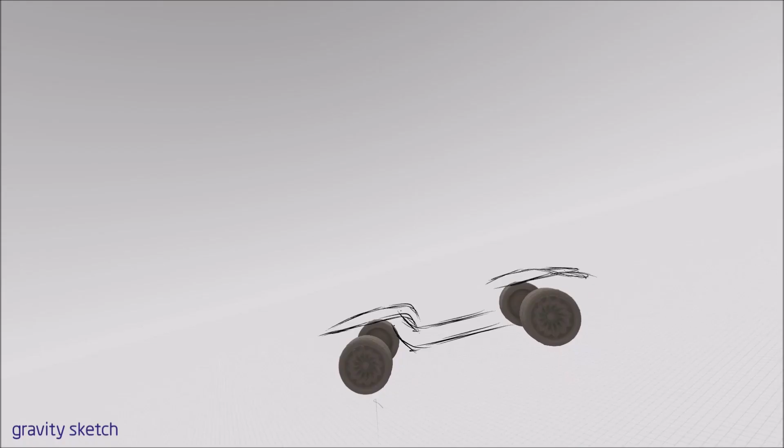So to get center line, press the tools menu, planar, and then you can move it around by pressing your pointer finger trigger and sketch on that plane. But if we half hold and point the face of the controller in the direction we want to go, we can lock it on center line like this, and then begin to sketch the center line of the vehicle.

You group all these lines together by grabbing them and pressing the purple menu button.

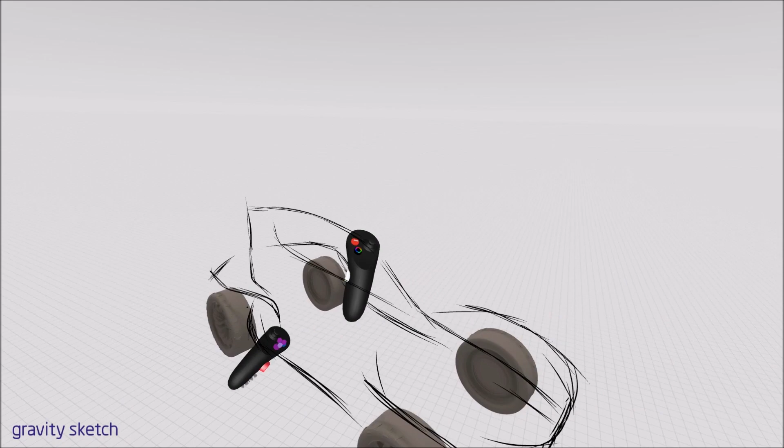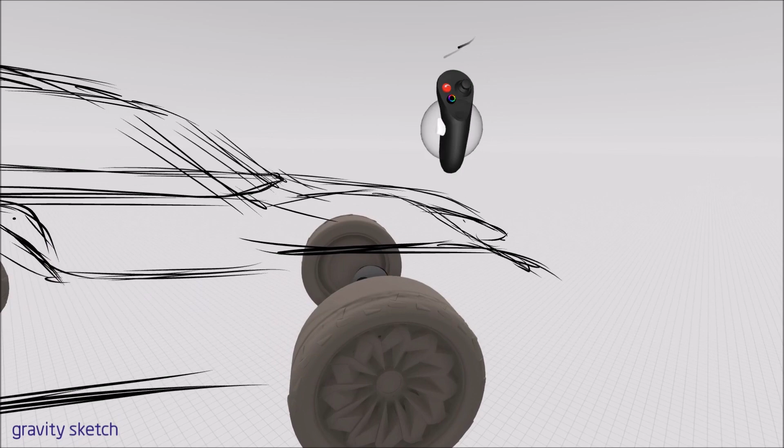If I want to move down this hood line here, I highlight with the grab sphere and then align my controller's head to toe like this, and then hold and move down.

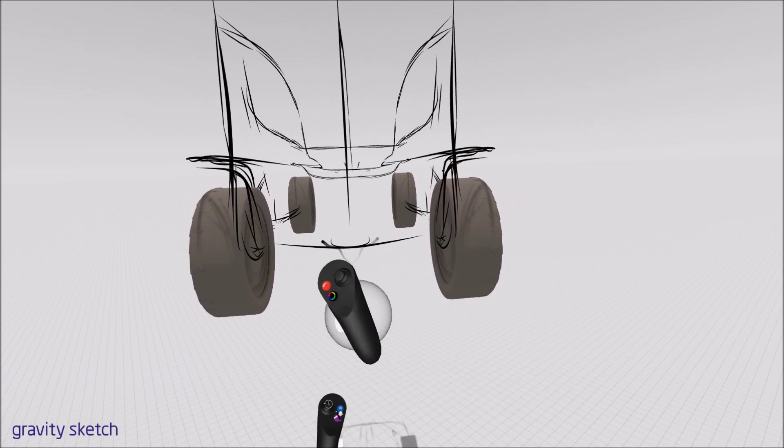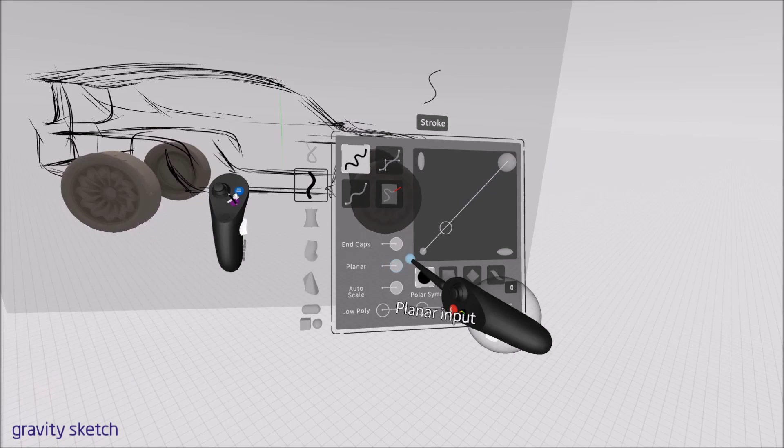A good way of making some wheel wells is to come to the tools menu, select stroke, turn on planar, and turn on precise mode, and then align that plane like this. And then click out those lines.

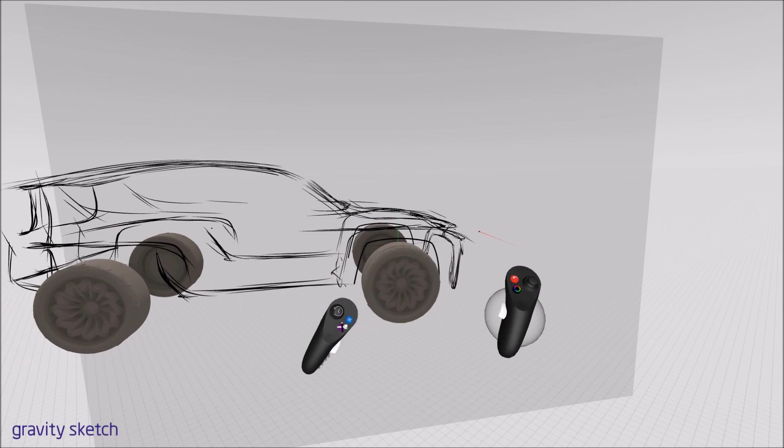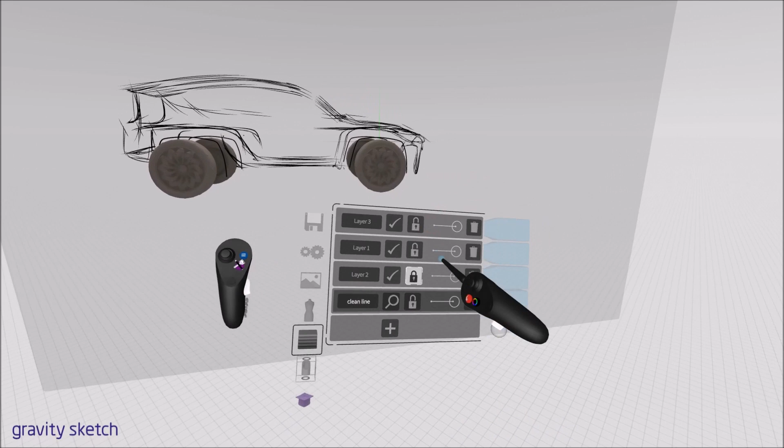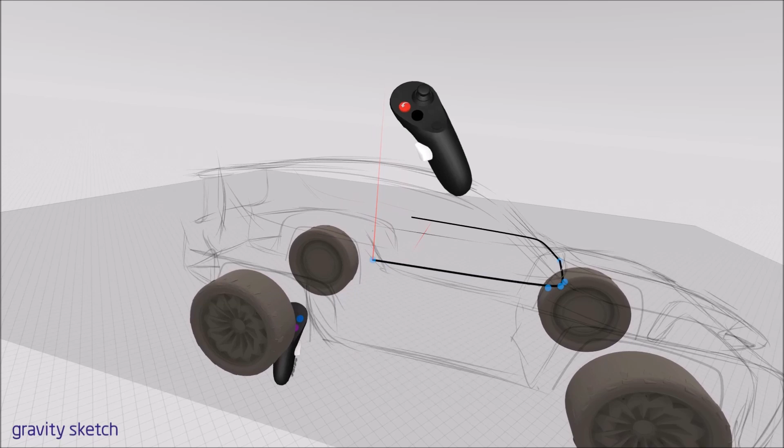We go to layers, get a new layer, clean line, lower the opacity, lock, and make sure that we have the magnifying glass on our new layer. Now come in here, start to make a clean sketch line. Magnifying glass just means that you're active to that layer. And if you click it again, you can minimize everything else in the space and just make that layer active.

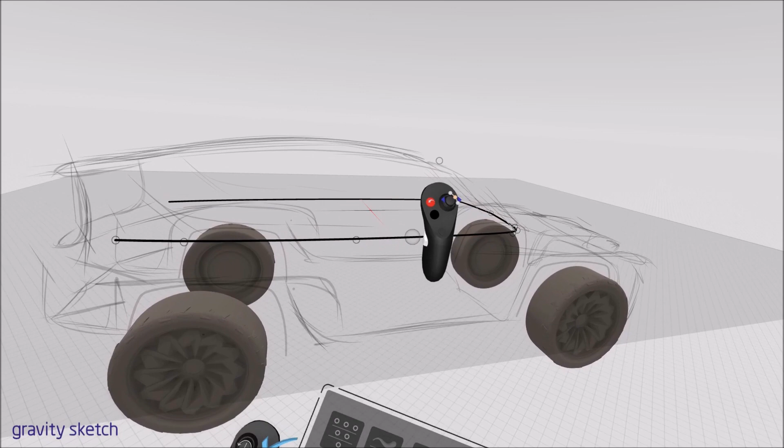Now I have a line that I made with Planar, and you'll notice if I put it in edit mode, I can't move the edit point up. I can only move it in these two directions. But because it's in edit mode right now, we can turn off Planar and then adjust it in all three axes again.

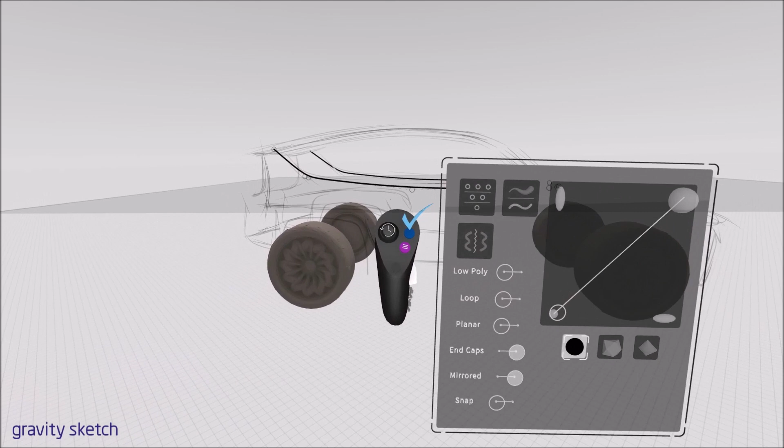Once you have it in edit mode, it's just going to be the blue check mark here, and that will take it out. And you can put it back in by grabbing the line, holding it, and don't worry about moving it, because as soon as you press the blue button again, it will snap back and you'll get a pin.

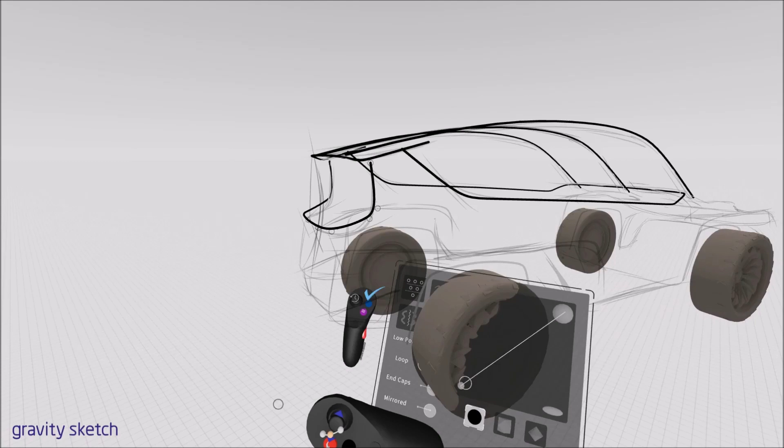Just doing a combination of just turning Planar on and off and getting clean lines.

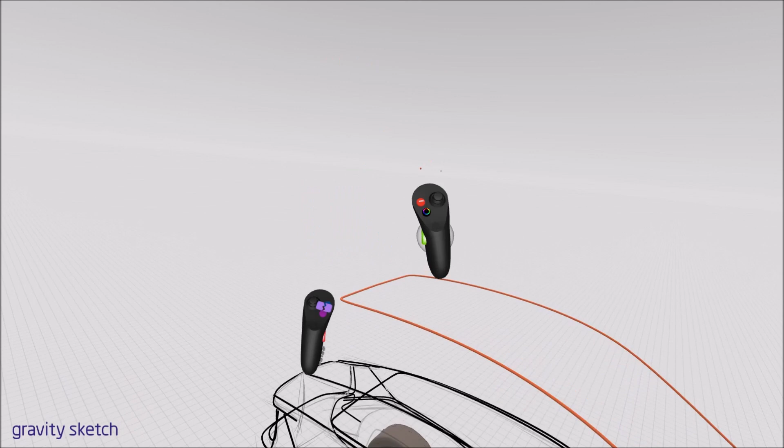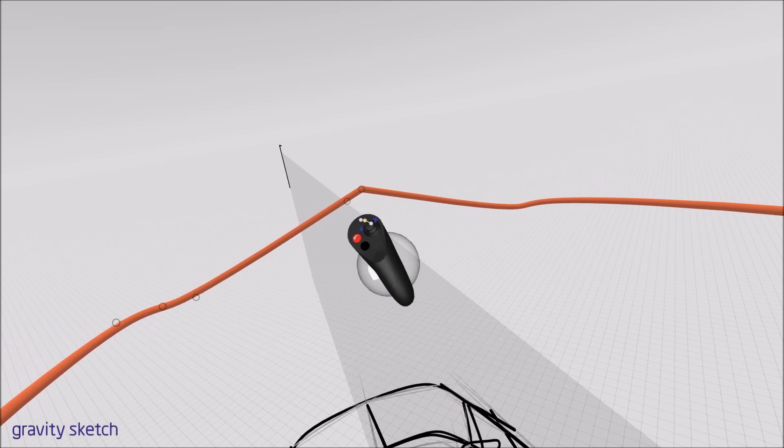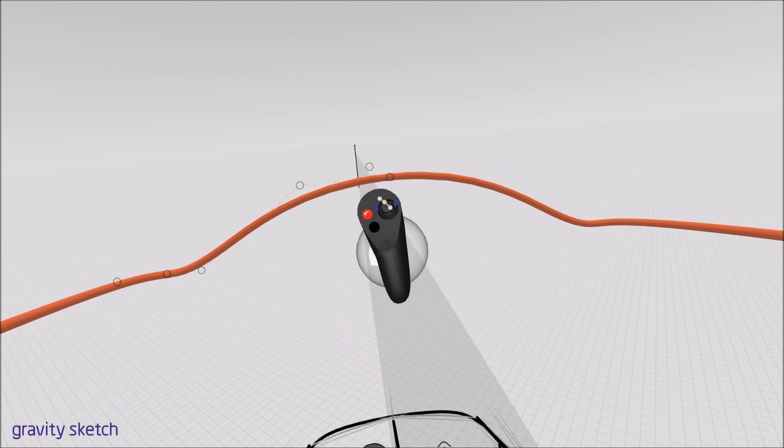And if you put a stroke into edit mode, as soon as you bring it close to the center, it will automatically connect. Now it's going to have a peak like this, so you want to add extra points by pressing that button, and then move them to the point where you have a smooth transition. It's not automatic, it takes a little bit of work, but you can still get a good sketch like that.

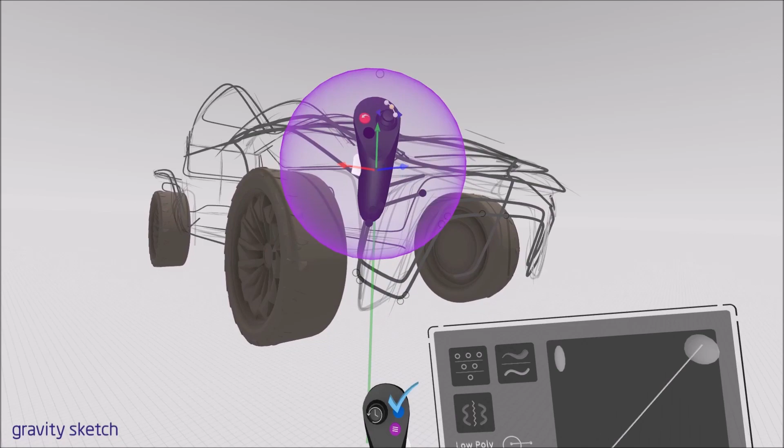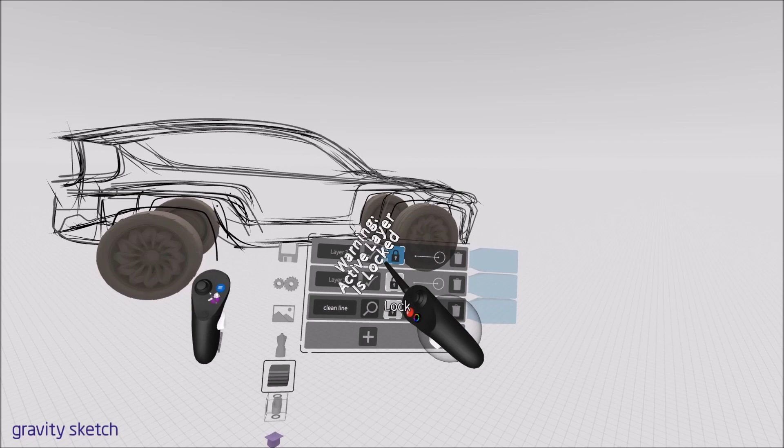Here's what I'm going to do. Now I'm going to lock the clean line sketch because I know that I want those lines to stay the same. But there's a few lines here on the messy sketch that I want to move over to my clean line sketch. So I'll unlock the messy sketch and unlock clean line.

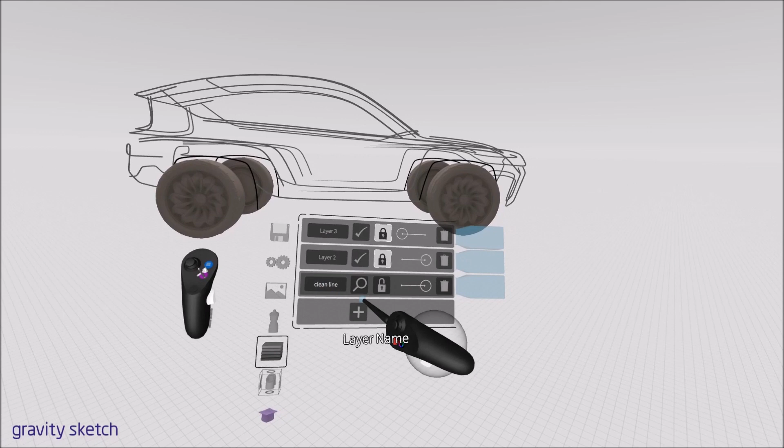Grab these lines and drop them on my new layer, my clean line. Lower the opacity on the sketch again, all the way down so I don't see it. Lock magnifying glass on the clean line sketch. And just so everything looks the same, I'll expand the grab sphere by going up on the joystick, grab everything, hold it, and change the color.

Now I'm going to start to hone in these lines. And to do that, I really want like a better environment. So I'll press the blue menu button, go to settings, and you have 3 tabs up here: Sketching Aid, Preferences, and Workspace.

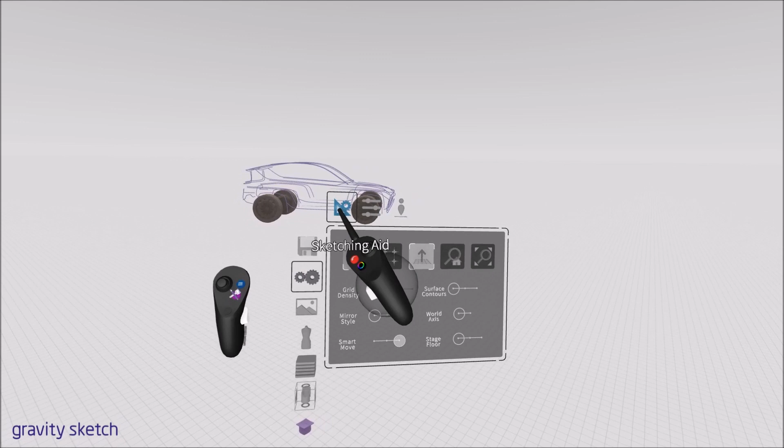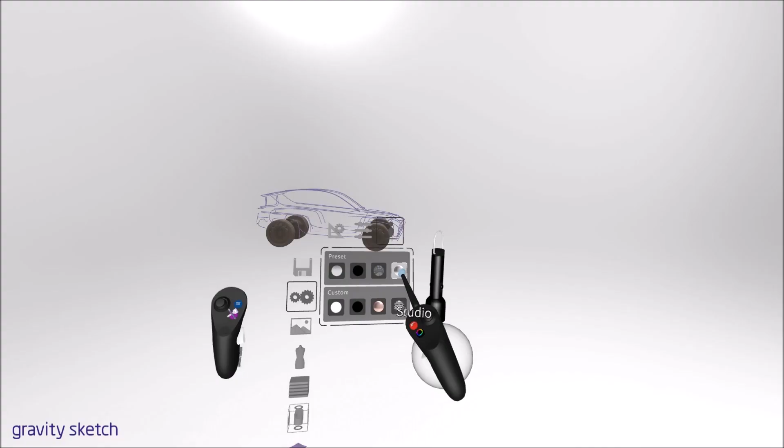Go to Workspace, and you have Custom Environments and Preset. So Preset is what we're in right now. There's a dark room, there's a warehouse, and then there's a studio room which gives you better lighting for surfaces.

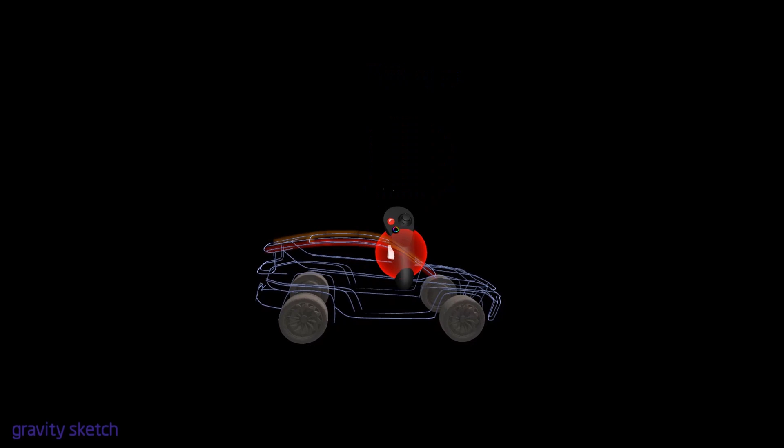But we're going to come down here to Custom because we can change the lighting and the color of the environment. So I'll make it black. And now come back in here. Make my lines blue. And so now we see we have even consistency.

It kind of looks like a bunch of tubes, right? What we want to do is give it a sketch feeling. But before we do that, I want to hide the lines behind here. It's a little confusing to see, right?

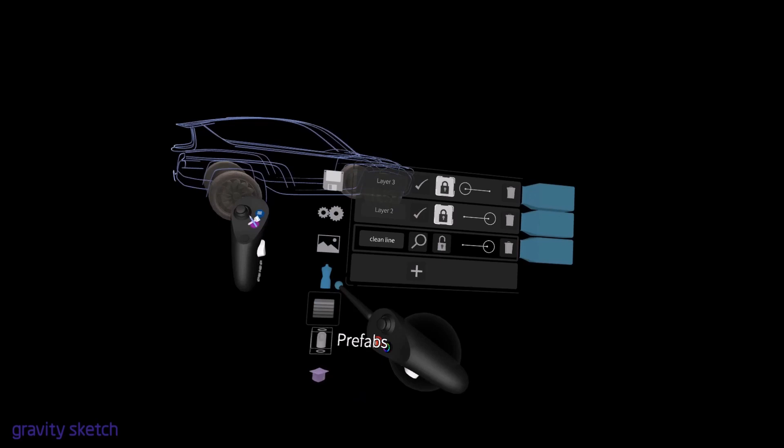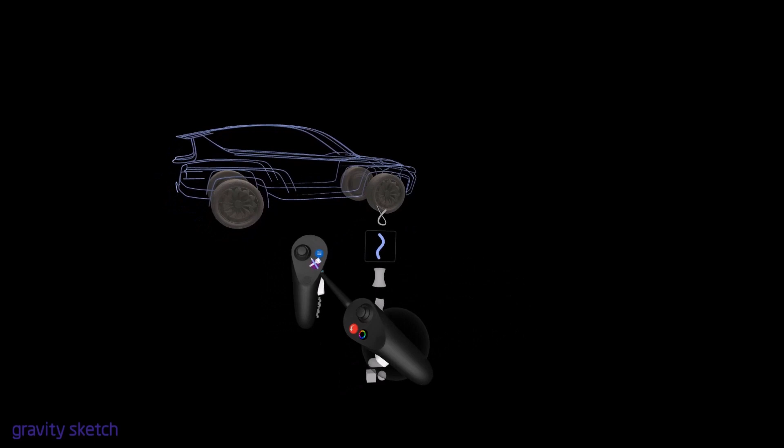So to do that, press the blue button and create a new layer. And we're just going to call this one Filler. We'll lock the sketch layer, press the purple tools menu and come to volume. And now turn this to a very bright color, something like this green. Now all we want to do is very roughly fill the shape within.

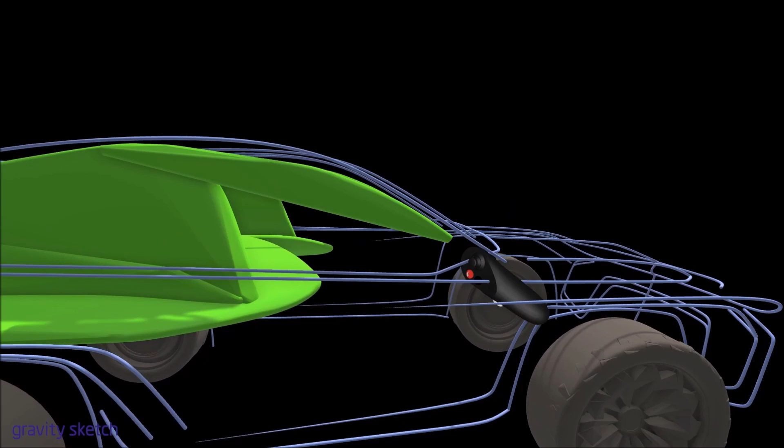That is a feature we just developed like two weeks ago. Essentially you hold this button and you press this button. Oh, there you go, there it is. I didn't know they put it in this one. Yeah, and it's still a little buggy, but when you rotate this controller, you should be able to evaluate highlights.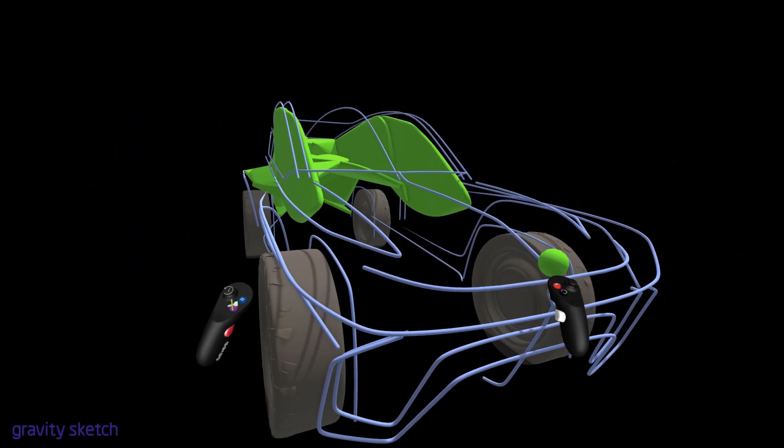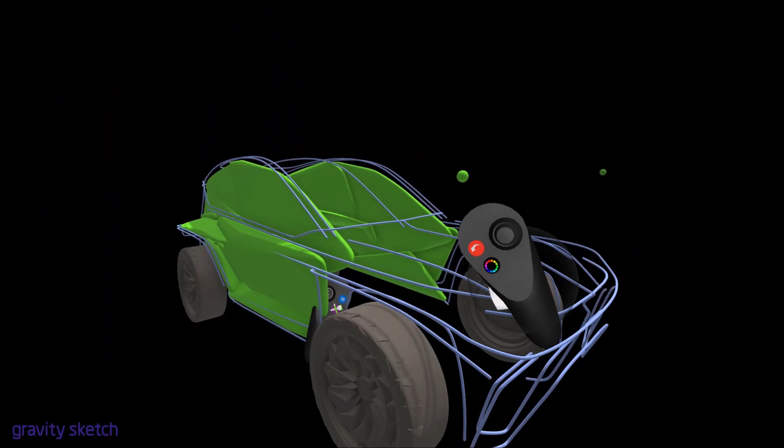But yeah, really quickly, we're gonna just come in here and fill this volume. The only thing you want to do is make sure you don't intersect lines like that. So if you do, you either delete it or put it into edit mode and just move these points up. Be very messy with this.

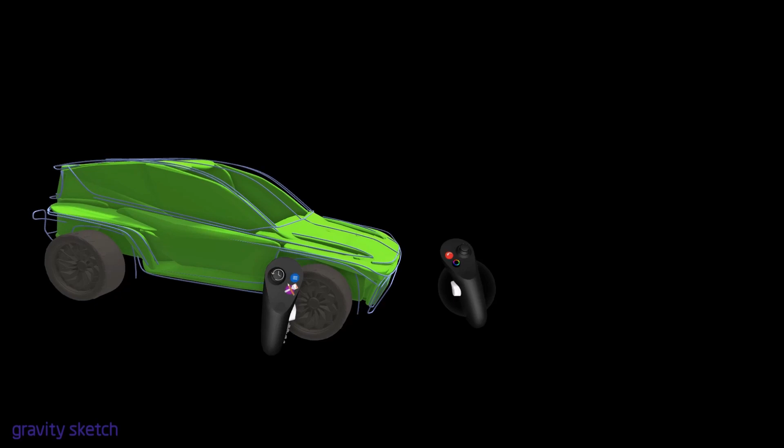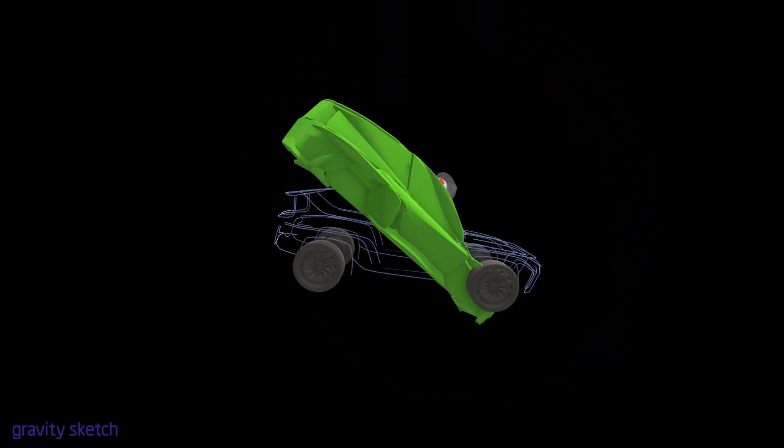Okay, but that's all right because we're not keeping it that way. Now, expand the grab sphere, grab this, and just to make it easier, press the purple button at the same time so it's grouped now.

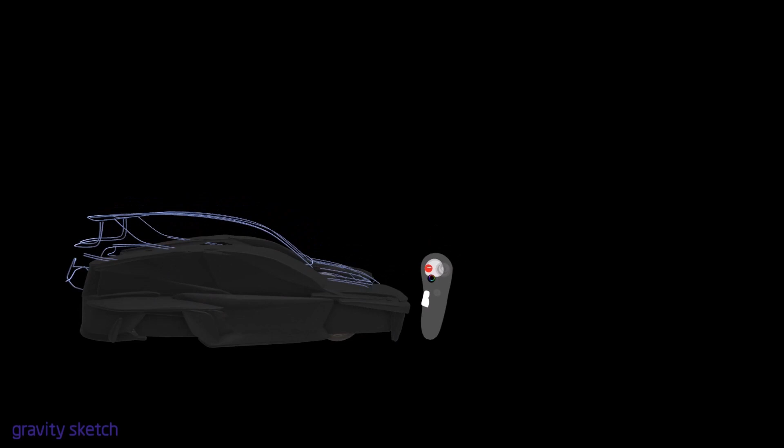Grab it again, press the color wheel button, and push in all the way until it's black. Grab it one more time and change it to flat material. And now that it's flat material, you can't really see through, yeah?

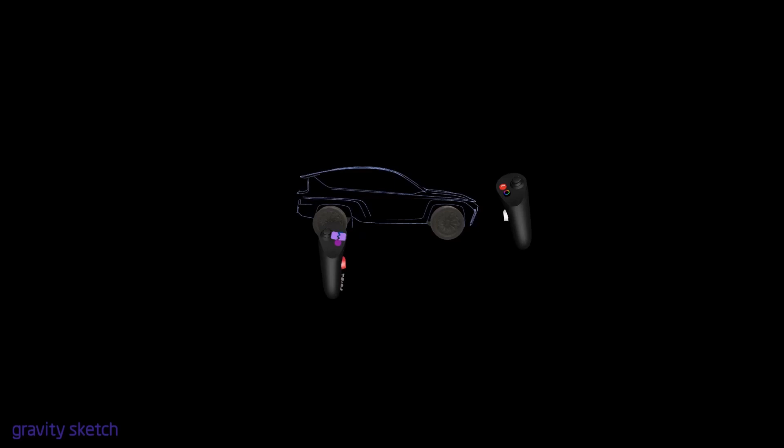So just because, let's say we want some white sketches, I'll come back, make the environment white, grab this, change it to white. All right, good enough.

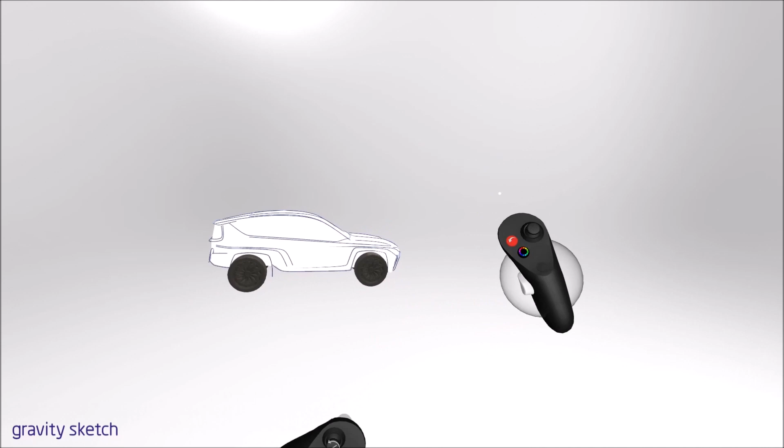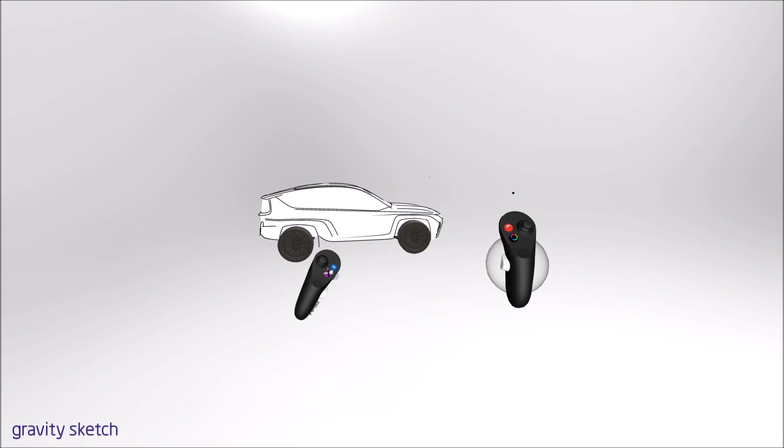Lock it, come back to the clean line layer, change these sketch lines to black. Oh sorry, the environment has to be flat as well. Now...

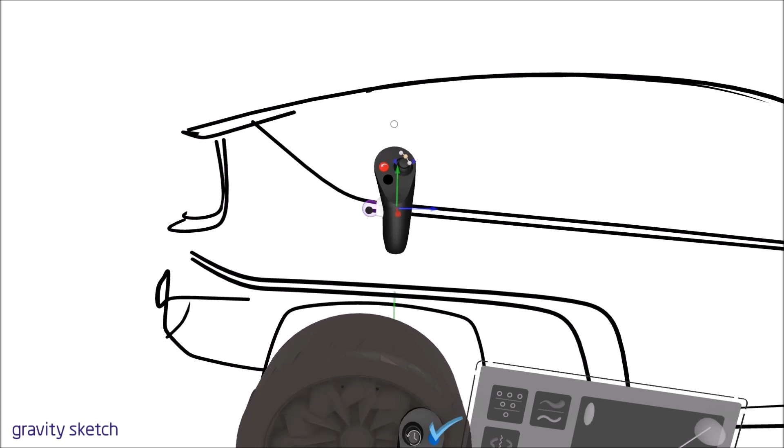I can come in and edit these lines, and so I want it to be like a sketch. So I'll grab the endpoints here, and while I'm holding them, go left and right to taper it all in. I can grab more than one.

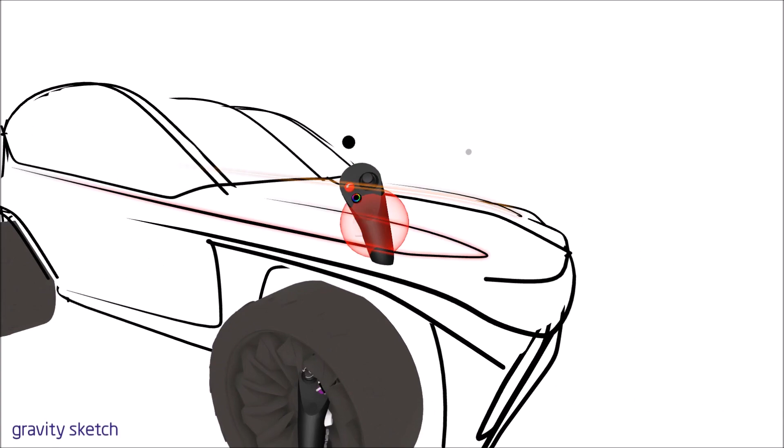Yep, just scaling it with the thumb. And this is really nice because it adds line weight. And we all know that line weight is one of the most important things for a good sketch.

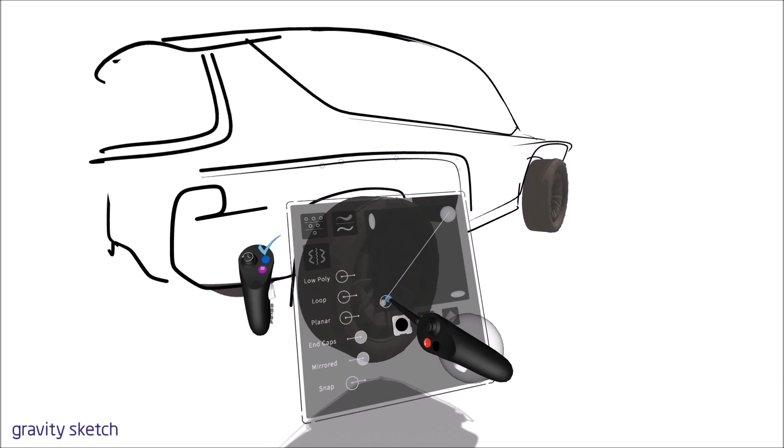Any other sketches that you can show using this basic version? Should be all of them. For this like one-time price? Yeah.

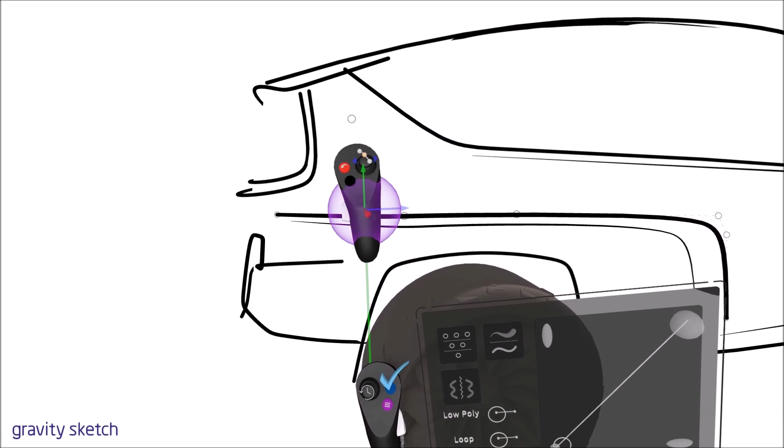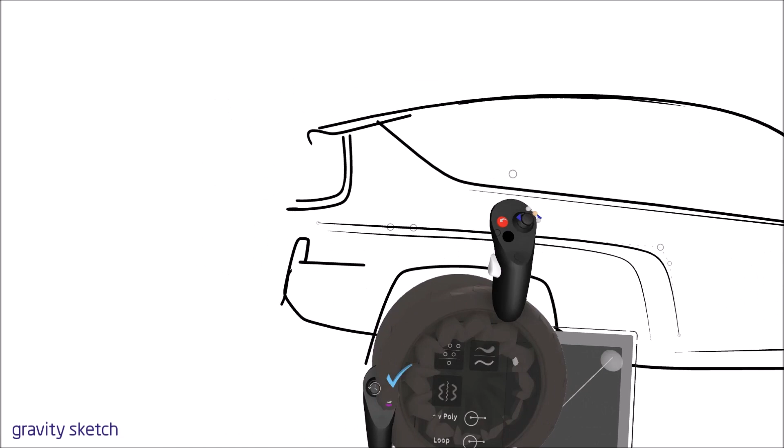Yeah, because the whole point of today's exercise is not complicated tools, right? I've only used about 3 or 4 tools this entire time. So that's going to be the goal of today, is to get a rough sketch out, and then hopefully in the second part of the day we can clean up the sketch. If not, no big deal.

And then I'll show you in a little bit that we'll move to Photoshop to finish the sketch.

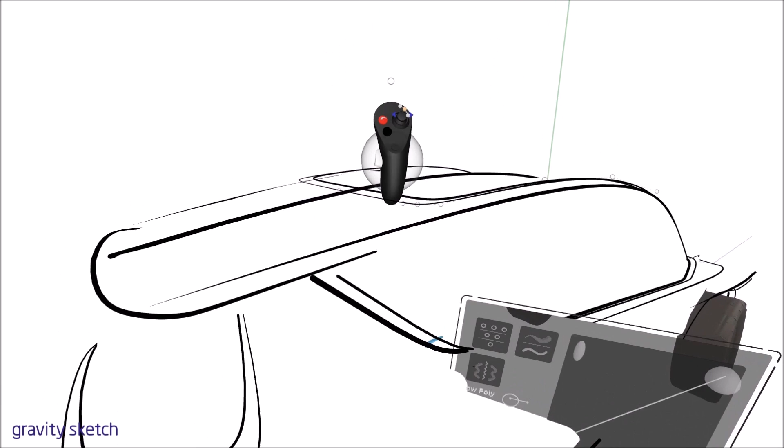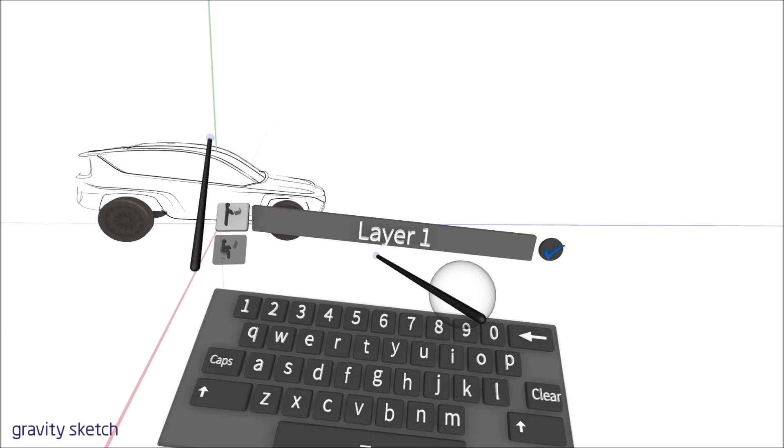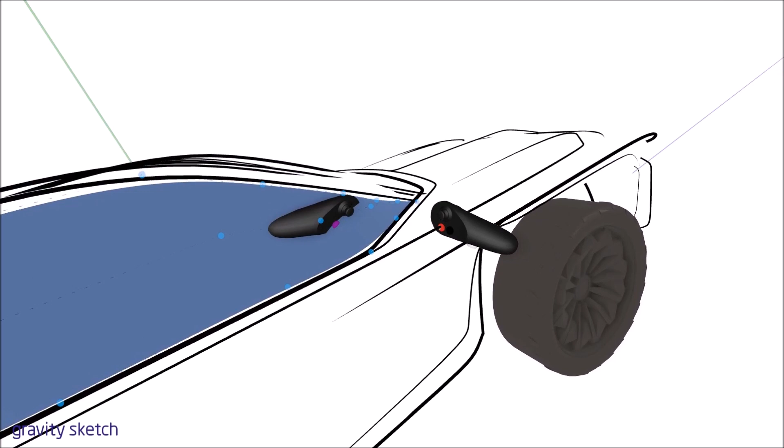After you've done that much, if you want, you can make it a little bit more detailed quickly, and come in with things like the surface tool, change the color, and just very quickly like this, lay in your windows. Move the points around.

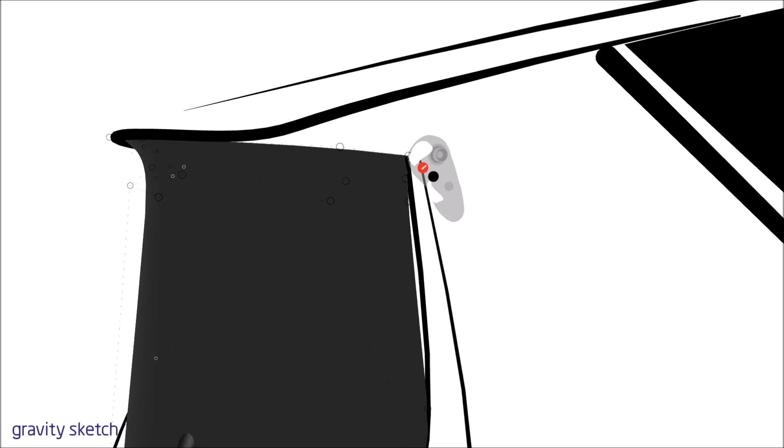Okay, so once we have something like this, turn off world axes, come to settings, and you can make a stage.

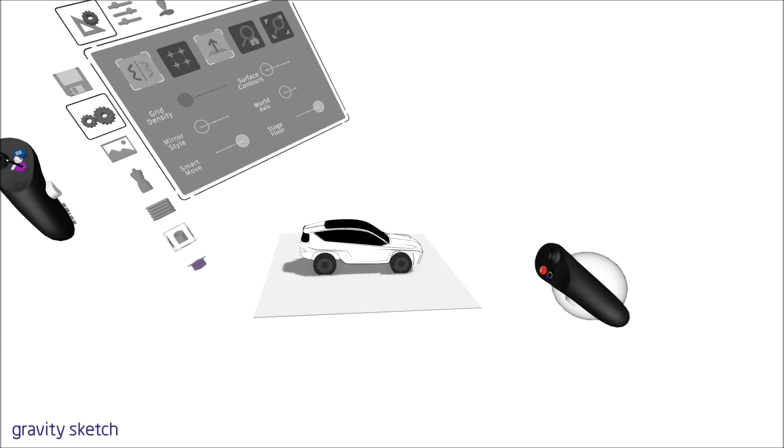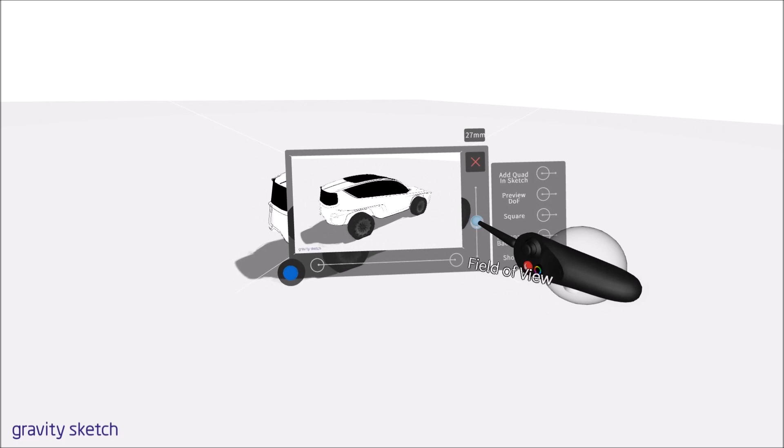Then the blue button again, take screenshot, and in here, adjust the field of view, and then also blur. Press the blue button when you want to take a screenshot.

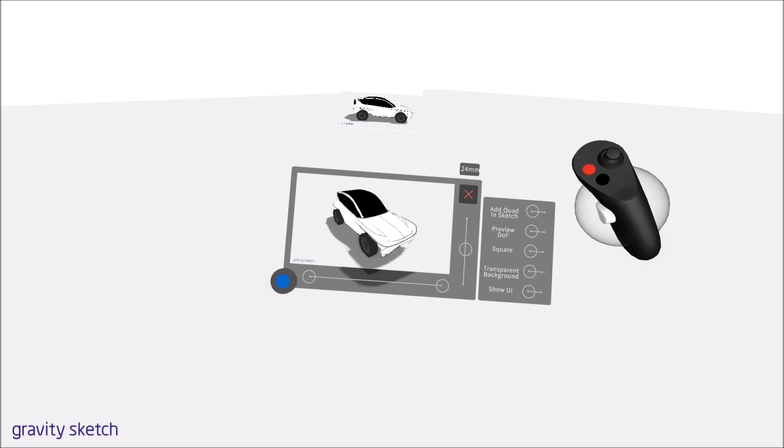So, yeah, that's what you do with the sketch. So if you spend more time, you can have much higher precision, vary the line weight, add section lines, do all sorts of things like that.

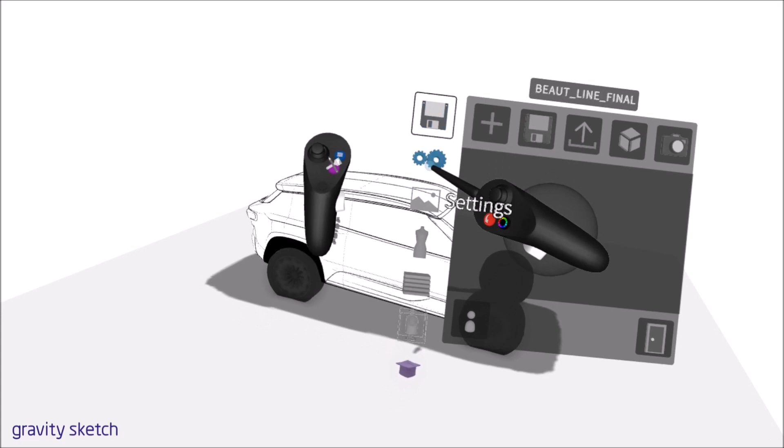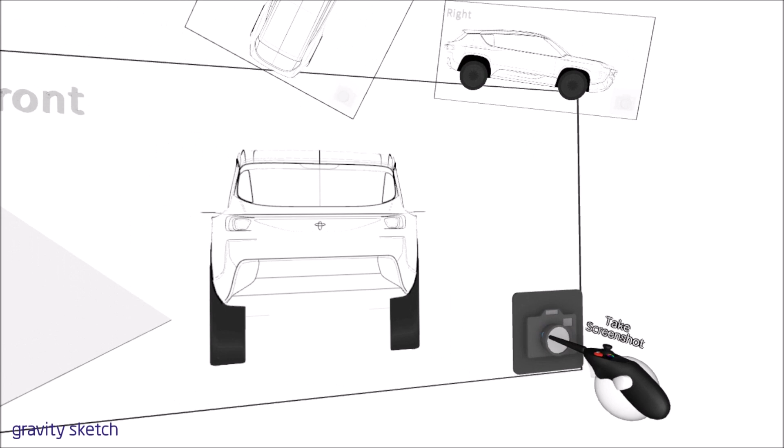And to get orthographic, to check your proportion, press the blue button and come down here to orthographic viewport. You'll get all the viewports on your hand like this, but what's nice is you can take the grab sphere and grab side view, top view, any view that you need, pull it out into the space and enlarge it, and then right down here you can take a screenshot of these views and then drop those into Photoshop just for reference. And it's also real time to show this.

So if I start sketching in the space, you'll see it updated there.

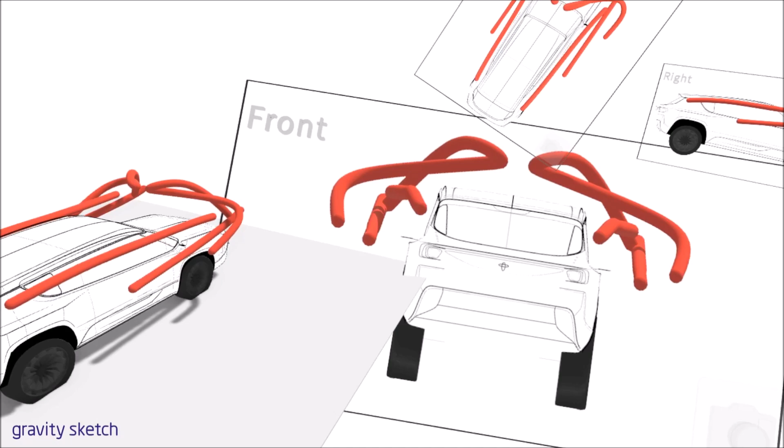You did a very loose sketch here and you understood the proportion well, then you could then import them into Alias and use your workflow there for a more precise design. I think that's probably good for now.